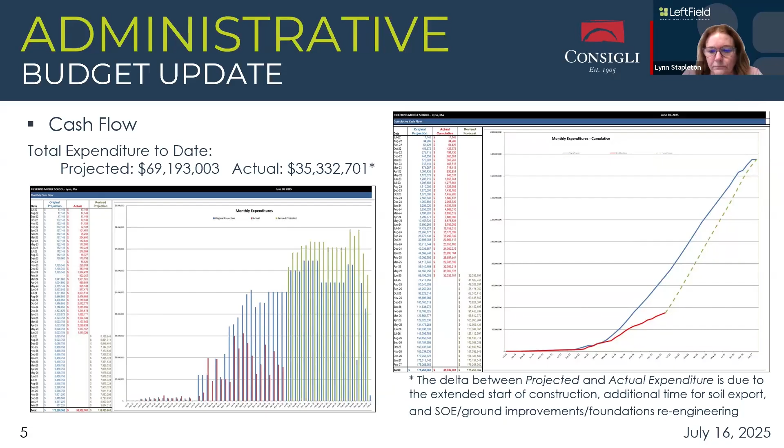So, do you want to take this? Do you want me to? Yeah, you keep going. Okay.

In terms of, we do have a pre-GMP 6, which includes the buyout of the ground improvements, and it is currently circulating for signatures. It is not the final GMP because we still have some unknown costs that we're trying to firm up. At that point, we will be issuing a final guaranteed maximum price, and that will include all of the unknown cost at this point. We hope to have all cost in by the end of July and be able to present the full cost in early August.

And now we've got some images to show you of progress on site. Brandon, would you like to take us through? Certainly. Yeah, so in this drone shot from a couple weeks ago, you can see in the building footprint we have the big piece of equipment that's installing earthquake drains. You actually see a bunch of them laid down kind of in the middle of the page here where that MWRA easement is, and we'll show you some more zoomed in looks after this.

On the left side of the screen behind the existing Sisson School, you see the prep for the switchback ramp, which we've made great progress on, even more so than some of the photos we have here, because we had another placement since we put this presentation together. So what you can't see in this photo is the infiltration system work on the north side of the existing Sisson School that we're well through right now. So we continued with everything we can inside of areas on site that the school needs back come the beginning of the school year, so we've pushed hard on those and continue to do so throughout the summer.

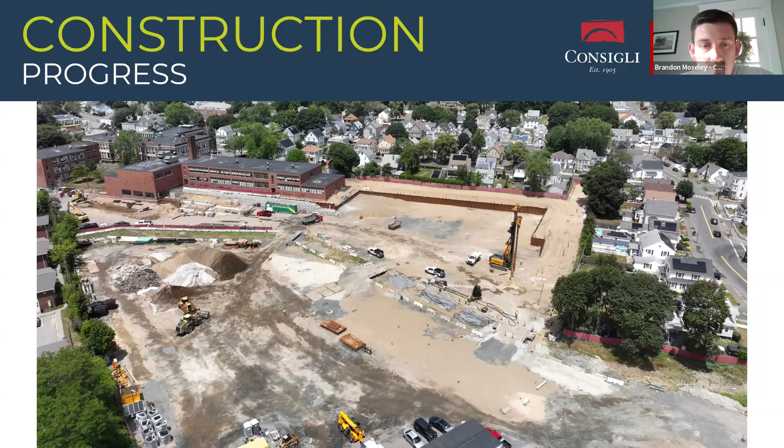These are the zoomed in shots I mentioned of the earthquake drain. So this is what kicked off our restart of ground improvement scope. On the left are the assembled earthquake drains, which is essentially a 4-inch diameter corrugated pipe with a filter sock tied on the outside of it, and on the right is the rig that installs them. These vary between 25 and 35 feet deep. This rig is set up to vibrate them in where we can away from the sheets, which we've done successfully the last week and a half. There's a total of 999 of them, roughly 400 of which will be drilled starting tomorrow. We've done approximately 600 already, which is some great progress over about 5 working days.

Brandon, do you want to just give a little story about the sequencing of how this is going to go? Yeah, so this was the first of multiple activities that we're going to complete relative to the redesign of the ground improvements overall. Next, happening in parallel, is going to be on one half of the site, our rigid inclusions are going to start, which we kind of think of as the replacement of the rammed aggregate piers that we had talked about as our original design. And then we have additional work towards the west side of the site to really firm up the sheets that we all know have moved when we did our work back in January. That scope of work is going to be happening concurrently on the west side of the site, closest to the school, while the school is still out of session, so we can get that whole thing firmed up, do our work close to the building, and try to work our way away from there as staff and students both come back right at the end of the summer.

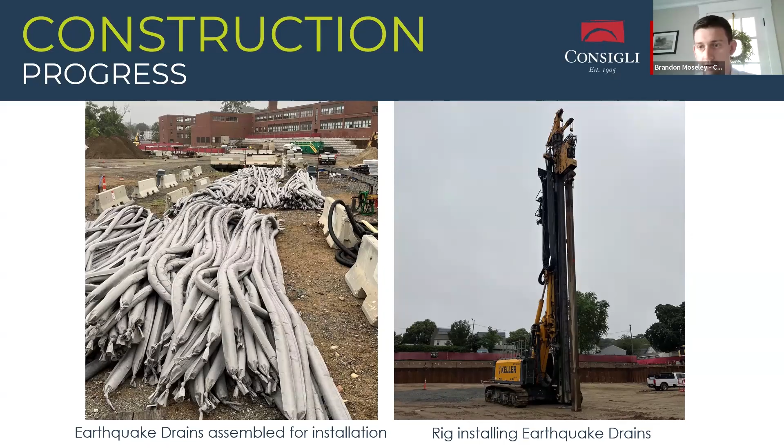These are some shots of the infiltration systems I talked about. On the left is south of the existing school, in what is the parking lot and playground area. That's the subgrade prep that was completed, inspected by the civil engineer, and we have since backfilled. On the right was the beginning of prepping for another infiltration system north of the school in the existing parking lot. We have now excavated to subgrade and started to install those structures and backfill them with drainage stone as well. So we're well on our way to get these areas turned back over for the fall.

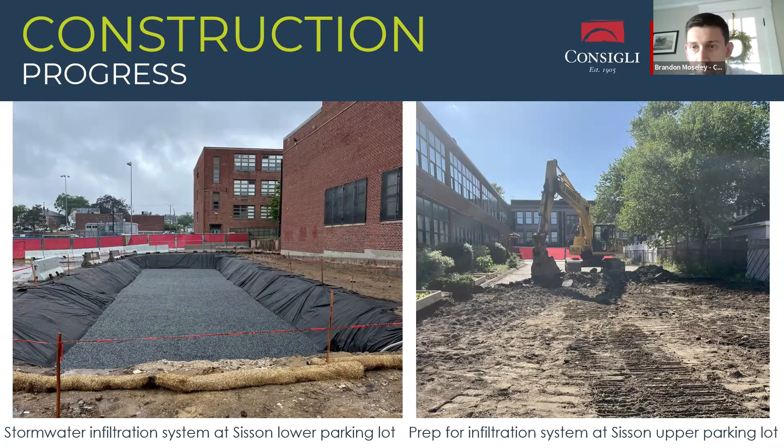These are some zoomed in pictures of the formwork and rebar for our foundation placement for the switchback ramp. These are the footings. We've since been able to complete a wall pour and stripped it, which I didn't have photos of just because of the timing for this month. We have 3 more placements to get through the rest of the concrete scope, which we have scheduled over the next 2 weeks. Then we'll begin to backfill that area, field measure for our miscellaneous metals railings, and really get this place cleaned up with the goal of getting it turned over before the end of the summer.

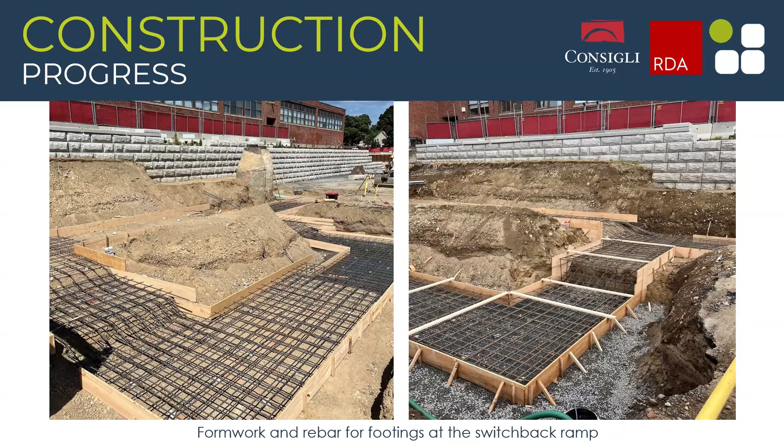So our next topic is an update on the ground improvements process that we've been going through. Since last meeting, Terracon, in conjunction with Keller, the design engineer and installer, have completed the design of the earthquake drains. Many of them have already been installed, and that process is moving along quickly and smoothly. Those 2 companies have also completed the design of the rigid inclusions, which is a major milestone. That work is now in peer review and pretty soon will be final and ready for installation.

Simpson, Gumpertz, and Heger has completed their revised design of the support of excavation, those sheet piles. That augmented design includes tiebacks, which will help hold the top of those sheets, whalers, which also help hold the top of the sheets, and jet grout piers, which will stabilize the bottom of the sheets, to really lock those in so that the remaining construction activities can proceed.

We've got 2 types of monitoring ongoing: movement monitoring, which is continuously observing any movement at the existing Sisson Elementary, as well as vibration monitoring, since Terracon has been monitoring the vibrations on site caused by construction activity. The closer that work gets to the existing building, the more carefully that will be monitored. And as Lynn mentioned, Consigli has prepared pre-GMP number 6, which includes this ground improvement scope. Left Field continues to keep MSBA informed about the progress of the project.

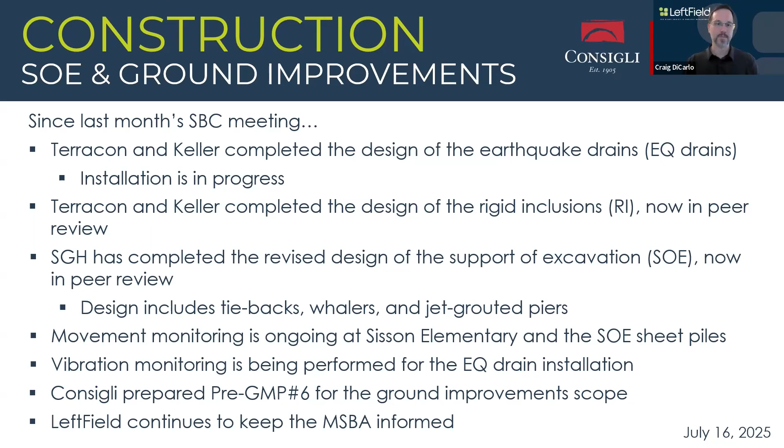I'm just wondering, was there any movement this month, like any more movement in the building? Or is that completely subsided? You're measuring that, right?

So right now what's ongoing is the continuous monitoring of the exterior of Sisson. Those points are very accurate and it alerts us if it appears there's been a movement of 1/8 of an inch. The engineer, Simpson, Gumpertz, and Heger, will contact Consigli and say, hey, we're getting an alert, what are the activities?

What we have found is we've gotten many alerts that are thermally induced. The building naturally moves, like every building, warming during the day and cooling at night. Or there'll be a piece of equipment in the line of sight, since this is all done by an automatic total station continually taking survey measurements. If a piece of equipment gets between the survey station and that point on the building, that will set off an alert.

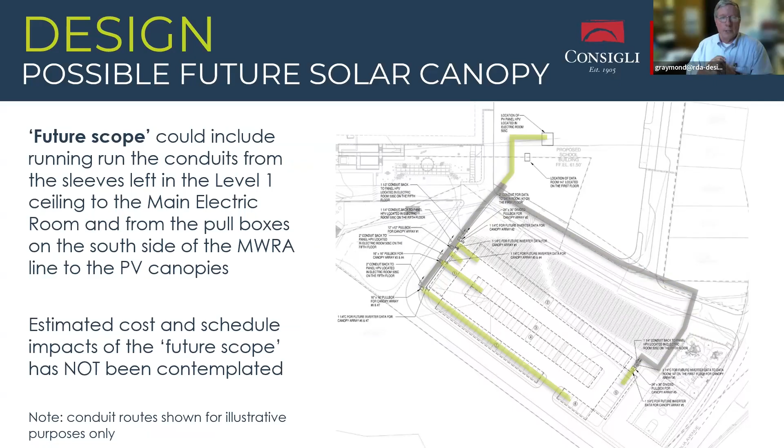This is Rich. Can you guys hear me? Yes. I'm in my car.

So under this bill that passed in Washington, they changed all the dates in order to get the tax credits. Does anybody understand what those are, in terms of when the city would have to do this in order to still be able to get the 30% tax credit that the Biden administration put forward?

Not on our side, I don't know. If anyone has... I don't think anybody has quite yet. Okay, thank you.

See, Mr. Mannion's got his hand up. Yeah, this is a well laid out plan for the future. Being an electrician, it's smart to get this done, as you said, with the MWRA pipe there and everything. For $55,000, it gives an opportunity later on, if the city has the finances and maybe there's something available later to do this. This is a very smart idea.

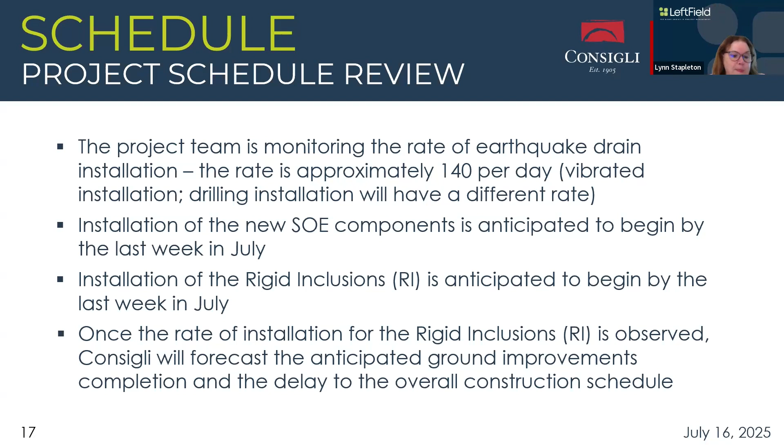Any questions about that? I did want to say that we are hoping to get steel erected, or begin, in the fall, which will be another major milestone.

Upcoming meetings, we've got another building committee meeting August 13th. I see Mr. Mannion's got his hand up. Yeah, speaking of the steel...

Do we have any idea how much these tariffs are going to affect this building, as far as getting the steel package out of Canada? Right now, based on the 25% tariff, we're just over 700,000 for the steel tariffs. Right now, all of our steel is sitting in the yard in Canada, waiting for us to be ready to take delivery. So if the 25% holds, we have that covered in our pre-GMP 6 cost.

And, hopefully, fingers crossed, maybe it'll go down. Okay, one more question. Was it put out to bid to United States steel companies or just Canada?

It was. We put it out to bid to anyone we work with, Tom. It just seems to be a lot of the big players are in Canada from a fabrication standpoint. That's just in terms of capacity and what we see most in the New England area. That's kind of who we have to work with. Yeah, Brandon, understood. Thank you.

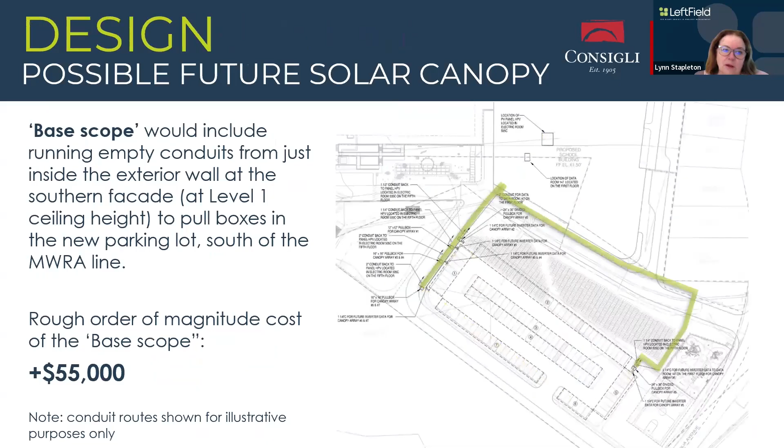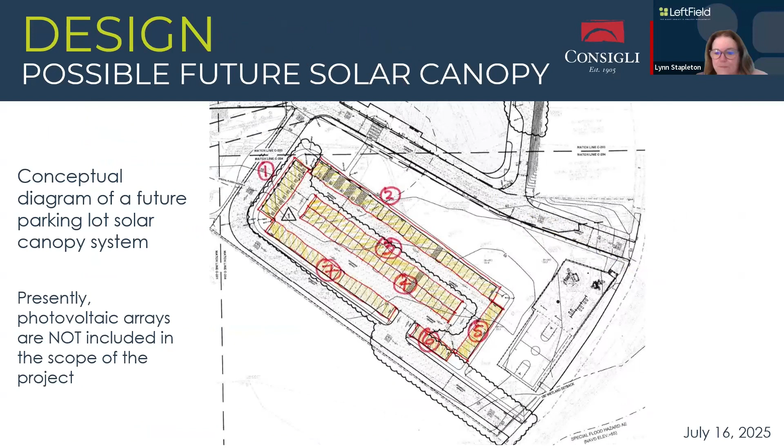Flory, I don't know if you were here since you were the one that asked about the future solar canopy. I just wanted to let you know that we did address that in this meeting. Yep, I saw a slide on that. Good. Thank you.

Anyone? Yep, Member Castellanos. Thank you. So I had a constituent reach out recently about some possible metal dusting impacting their pool. I want to say thank you to Lynn and the mayor, Danye, all you guys for responding pretty swiftly on that. Could you, I know there was a process, Lynn, you discussed there's a protocol and process through the insurance company that we utilize. Could you kind of talk about that a little bit?

And it's on Konomo Ave too, so I don't know who else. Obviously there's a bunch of pools around that area, I don't know who else might be impacted by that. Obviously there's a process that we have to follow, but can you kind of describe what that is?